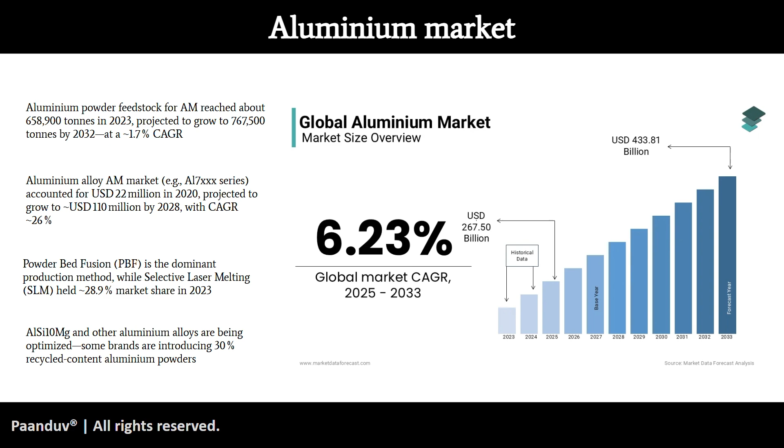If we look at different growth rates, they go all the way from 1.7% all the way up to 30%, but on an average this global aluminium market is growing at a CAGR of 6.23% as predicted for the next 8 years.

Additively manufactured aluminium parts are high performance and they offer many interesting mechanical and chemical properties. They have a very high strength to weight ratio and are weather resistant. They are less rigid compared to steel, and of course there are many other benefits that go around with the aluminium alloys. In fact, when we travel, when we use cars, there are a lot of components that are made of aluminium alloys already.

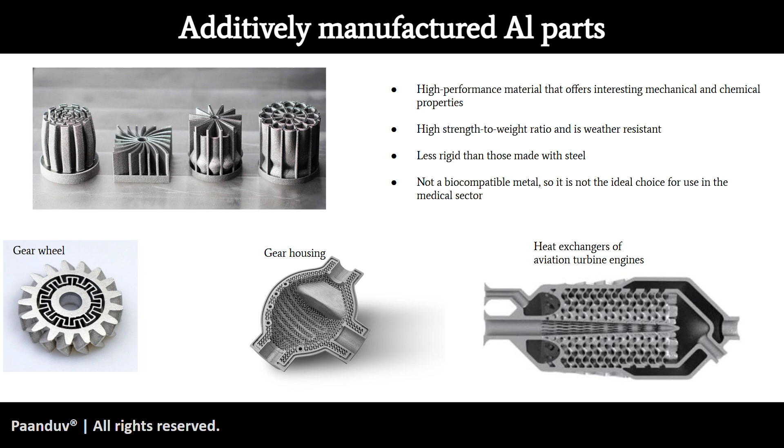However, when it comes to the AM printability or the processability of aluminium alloys, it can be quite challenging. But with challenges comes a lot of scope for research and development and further improving the way aluminium alloys are currently used. For example, the printability of pure aluminium is quite a daunting task. However, AlSi10Mg and other alloys could be an excellent option when it comes to laser powder bed fusion type of additive manufacturing.

Again, if you try to do multi-material welding, for example, aluminium and copper alloys or aluminium, zinc and magnesium alloys, the printability is again poor. It causes cracking, oxidation, poor weldability and problems like that. However, when you talk about aluminium, magnesium, Sc and zirconium sort of multi-material welding, then you can again have excellent printability using both direct energy deposition or laser powder bed fusion sort of additive manufacturing processes.

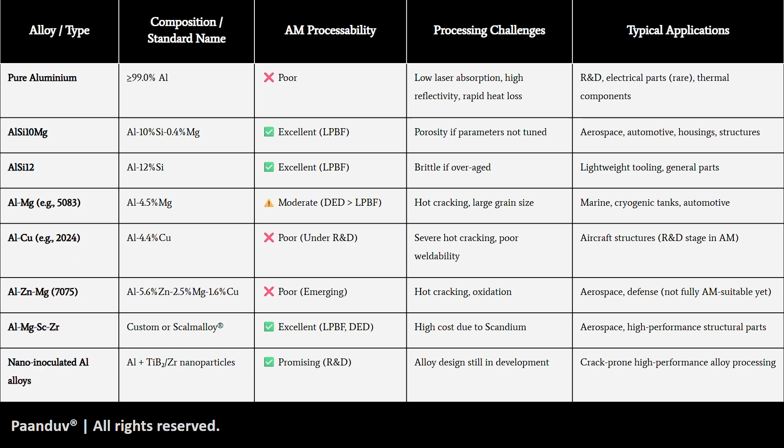When we talk about defects in additive manufacturing, irrespective of whether it's an aluminium alloy or some other alloy, we typically encounter the same sort of defects. They can be more pronounced in the case of aluminium, but the defects remain nevertheless. For example, keyholes, which is one of the most scary defects that all 3D printer users want to avoid; spattering, liquid breakup, extreme porosities, whether due to keyhole or other modes of heating; vapor depression, vapor plume ejection, humps that reduce the surface finish of your part, and many other defects that we encounter on a regular basis.

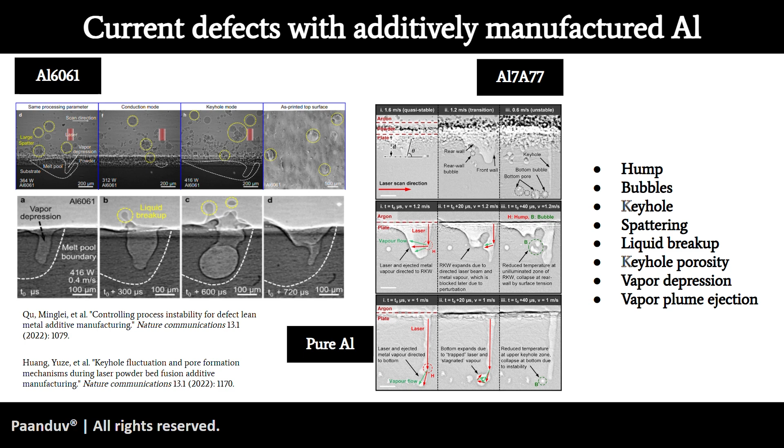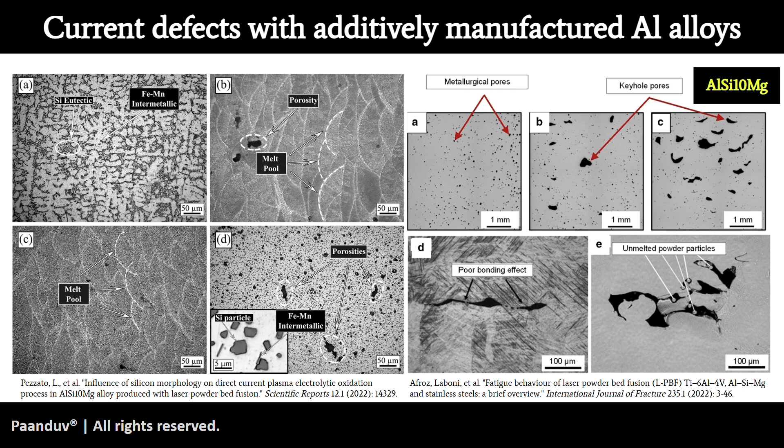Talking a little bit more about these defects, specifically for AlSi10Mg, which is one of the alloys of interest for today's talk. There are many porosity and poor melt pool dynamics related defects. There could be metallurgical pores, keyhole pores, a lot of unmelted powder particles, poor bonding effect, and you name it, basically the entire gamut of defects that you encounter in additive manufacturing in general can again be seen in AlSi10Mg alloy, which has a lot of applications in aerospace and defense, but also comes with its own set of defects.

There are many ways of getting rid of these defects that we encounter in the additive manufacturing industry in general, and the same methodologies are also applicable to aluminium and its alloys as well.

A typical aspiration for an AM process engineer is to provide a sustainable technology, in this case additive manufacturing, to prevent wastage of material, not only during the experimentation stage but also during the production stage, to achieve a heterogeneous fine grain structure or grain microstructure which directly corresponds to the mechanical strength of your built part, and to produce a near net shaped component requiring a very minimal amount of post processing and finishing to the part.

While these are very noble aspirations to have, a significant amount of experimentation goes into attaining these goals. And at the core of it, much of the experimentation that happens goes around understanding the melt pool geometry, goes around understanding the microstructures, using fancy experimental machines at times.

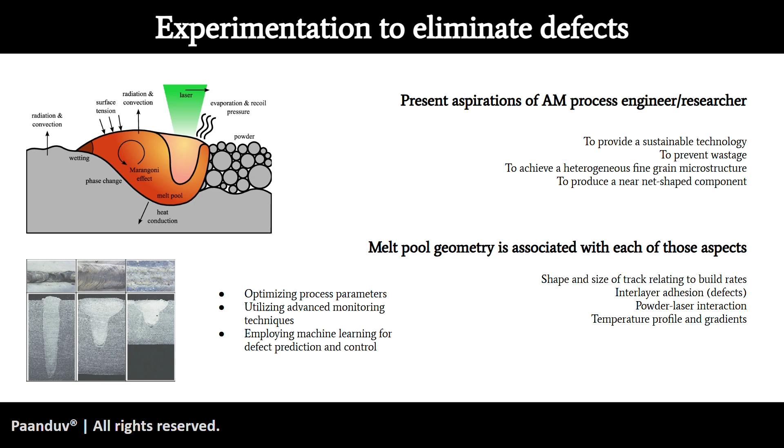The challenges in experimentation are of course there. In short, the cost of such experimental machines can be quite huge. The resources that go behind the type of expertise that is needed to operate these machines is quite huge. The cycle time could be in the order of months before you get the data back from the experiments.

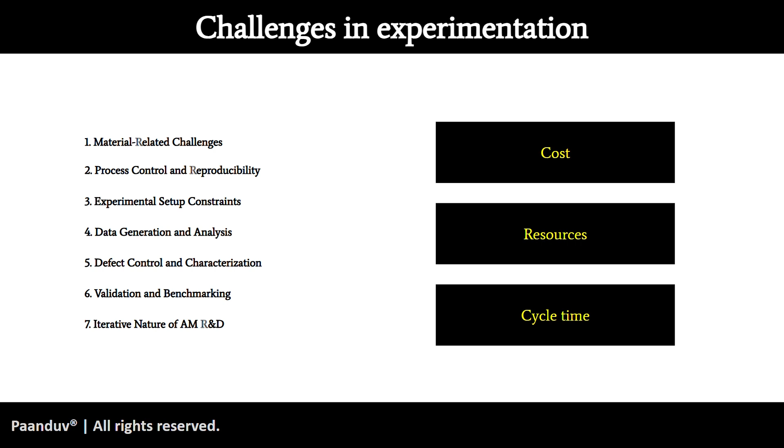And then there are material related challenges, process control and reproducibility, human errors, experimental setup constraints, data generation, storage and analysis, defect control and characterization, validation and benchmarking, and iterative nature of additive manufacturing research. I mean, at the rate at which new materials are innovated, at least at that R&D level, at the speed at which the overall additive manufacturing market is progressing, there's a very fast iteration that is needed to these sort of experiments.

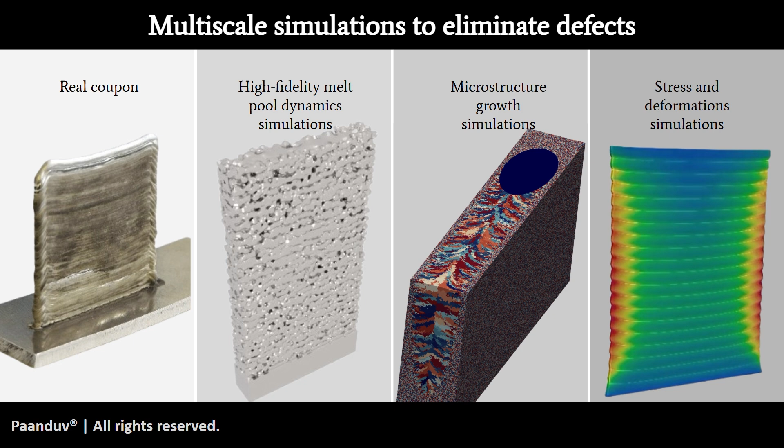The image on the left hand side is a thin plate, a real coupon printed using 3D printing. Then the second image is that of a high fidelity melt pool dynamic simulation for a 20 layer thin plate build, simulated using AM PravaH. The third one is a microstructure growth simulation, the grain evolution of a thin plate. And the fourth one is the stress and deformations simulations, the data associated with the thermomechanical stress analysis using AM PravaH again.

So in short, what I want to highlight is that predictive modeling is quite capable of capturing some of the very hidden details about the defects that can happen in 3D printing processes. It can guide us, point us to the right direction as to what must be changed, what must be optimized in order to produce a very good build, irrespective of the process.

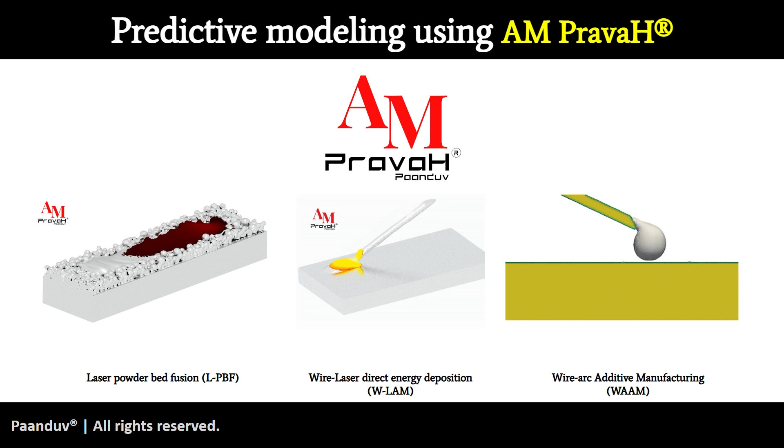Something which is very tricky to do in experiments is laser beam shaping, because there are standard laser machines that exist all over the world. And if you want to make a square laser because you think those lasers are the best in the world, there's simply no way to experiment. The only way left in certain scenarios is through simulations.

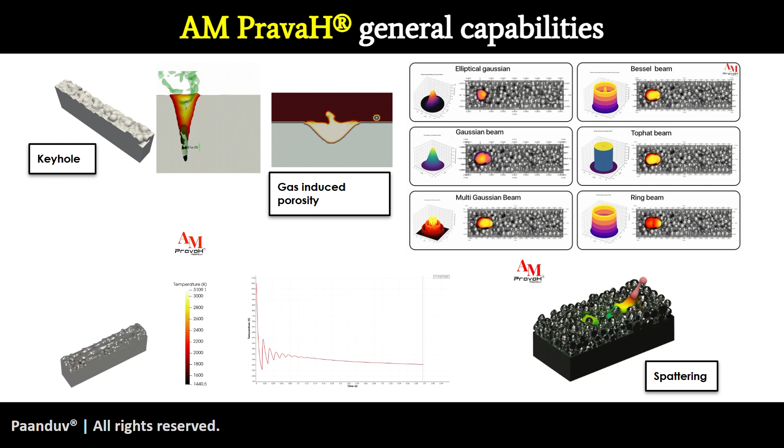The last one is spattering again. This is again a very difficult process to capture in experiments given the very high temperatures at which additive manufacturing processes operate. It could be easily 4,000, 3,000 degrees Celsius. There could be very hot vapor plume inside the chamber.

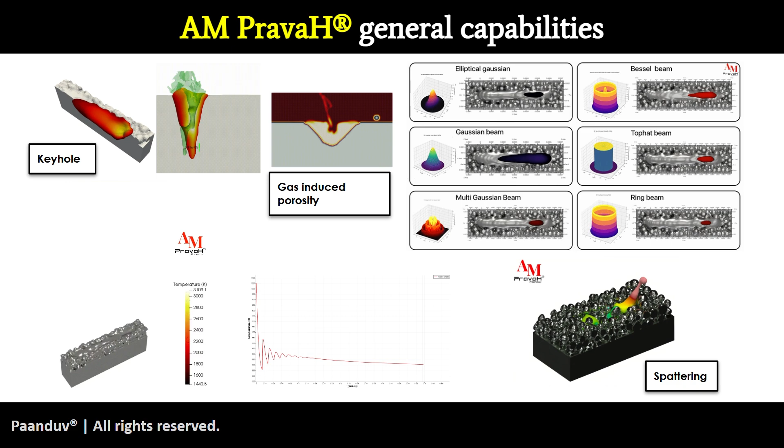So everything that we saw on the previous slide, those defects were captured using melt pool dynamics alone. But then there's a solidification aspect as well associated to additive manufacturing processes. And that's where microstructure evolution, how your grains are orienting, reorienting, or misoriented based on the movement of the laser over a particular alloy, is very critical. You want to look at the crystallographic texture, you want to look at inverse pole figures.

There are, of course, machines, EBSD machines, that can give you this sort of detailed data. But those machines are very expensive. They cannot be operated on a regular basis. They have a very huge cycle time for processing the data. And despite all that, you can do only as much. You can only probably run one or two experiments every month.

But with AM PravaH's capability of predicting microstructures using kinetic Monte Carlo models along with other coupled models, these results can be generated in a much easier manner in a very short span of time, and you can save a lot of money on that. In fact, everything that you see on this screen is generated from AM PravaH.

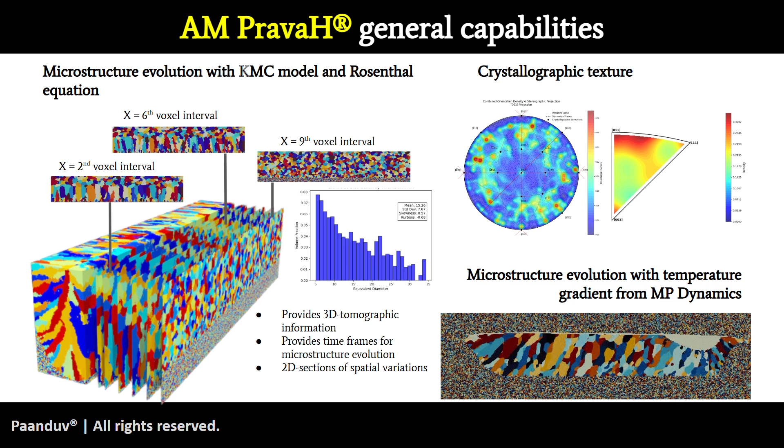Now, it is very important to couple the melt pool dynamics, which is happening at a continuum scale, where all your momentum conservation, your energy conservation, your mass conservation, your phase change, solidification, everything is happening. It is very important to couple that entire gamut of computational fluid dynamics with microstructure data.

So the flow of simulations is, you first run high fidelity melt pool simulations, then using the dynamic thermal and solidification fields, you predict the microstructure evolution. In the background, there's a Monte Carlo nucleation and growth model that is taking care of the grain evolution, grain initiation, and their growth.

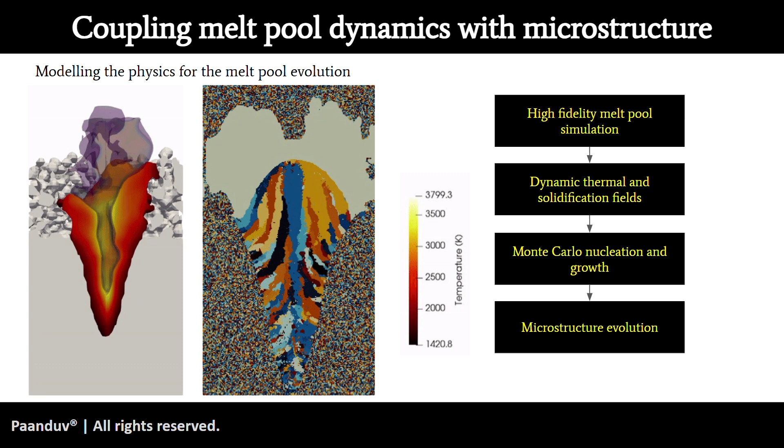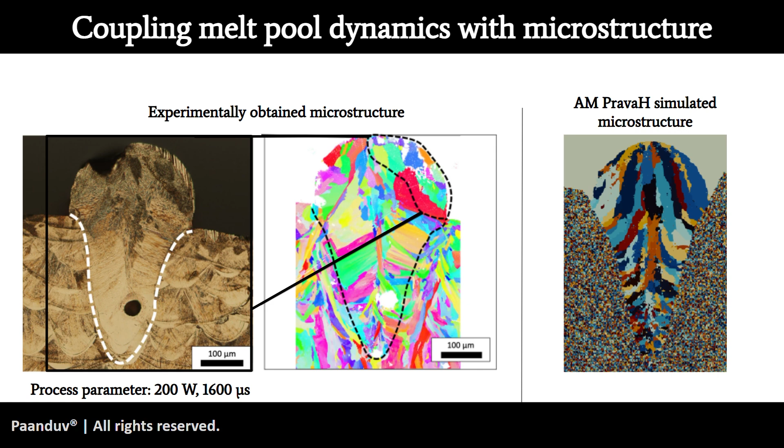So the first two images are coming from the experiments, and just look at the third image, which has come from pure simulation from AM PravaH's microstructure module. Just look at the excellent overlap of these two microstructure images and how nicely, qualitatively and quantitatively, the microstructure information is captured using the microstructure algorithms.

What I'm trying to say is that AM PravaH is the world's first all-inclusive simulation software for the AM industry. It is for the AM industry because it caters to different processes within the AM industry. But more importantly, it is all-inclusive because we are going all the way from powder manufacturing using gas atomizers, plasma atomizers, water atomizers, to powder spreading, to melt pool dynamics, to microstructure grain evolution, and finally to the part scale deformations and stress information.

And to my understanding, if you can capture all these five aspects of an additive manufacturing process, you have basically attempted at the best optimal defect free part production. So we do end-to-end simulation with AM PravaH for additive manufacturing, from AM powder to part scale.

AM PravaH cuts down the cost by 67% in initial process optimizations, 20 to 30% savings on material costing, and it can reduce the rate of failure by approximately 10%. It saves experimental trials and characterization, and sometimes it's not about saving the number of trials, it's about doing the right type of experimental trials.

You don't want to take a very diverse set of experiments just to figure out something close to optimum. You can attain a close to optimum solution using simulations, and then around that optimum you can do more experimental trials. And clearly for AM processes, including LPBF, this could emerge as a very good virtual twin as well.

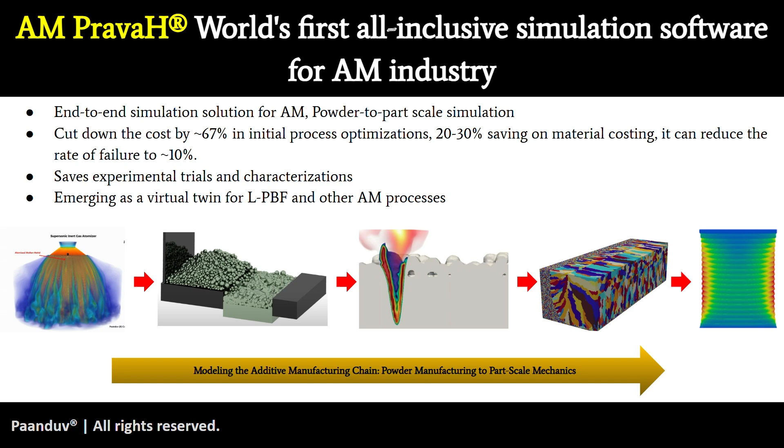Today, for the purpose of this talk, because there's a huge audience, I presume, which will be very interested to know about the simulations of additive manufacturing processes. It could be LPBF or just a good old welding process for different alloys of aluminium, or it could be pure aluminium, or it could be aluminium and copper welding.

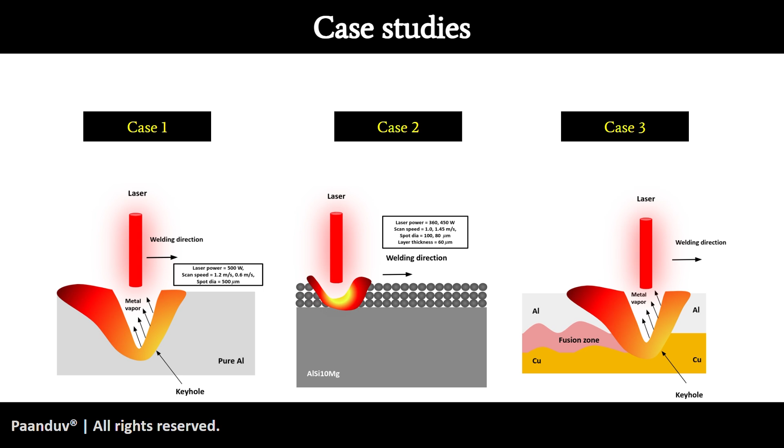So in the first case we'll be looking at pure aluminium. In the second case we'll be looking at AlSi10Mg alloy, and in the third case we'll be looking at a multi-material weld of aluminium and copper, and we'll see how these simulations give us different insights about these processes and how well they compare against the experiments.

Case 1 is the 3D printing of aluminium plate using AM PravaH, high energy density, and there's a huge interplay of multi-physics. I would like to bring your focus to the genuine high fidelity nature of these simulations. Just look at the image on the left hand side, which is coming from the experiments, and the image on the right hand side, which is coming from AM PravaH. Notice the defect formation, the pore formation, the hump formation, and you name it.

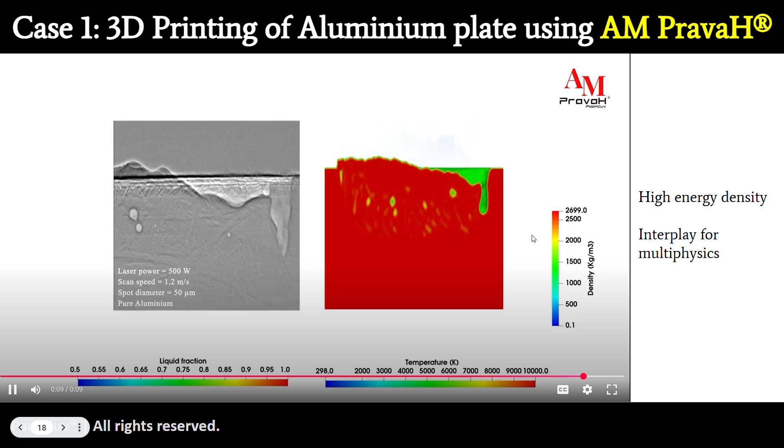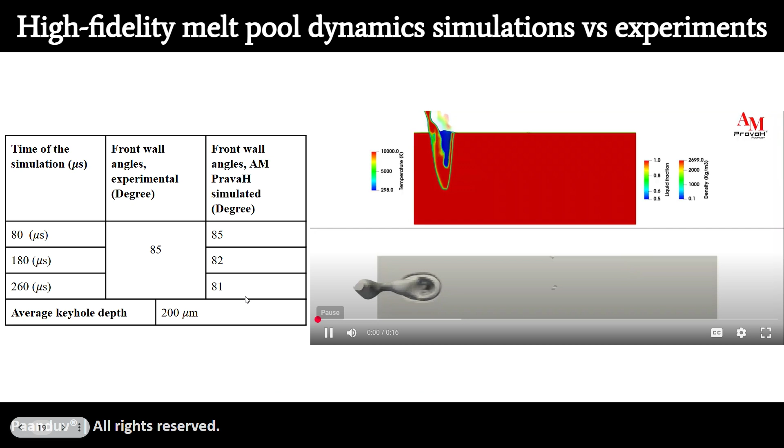While this simulation may look quite straightforward, the amount of physics equations that are solved in order to capture this process accurately has been quite challenging. I want to play another video from a different angle and at an even higher fidelity. Just look at the pore formation, how some of the pores are stuck in the solidification phase, some of them get ejected out. Even observe the plume, the vapor plume.

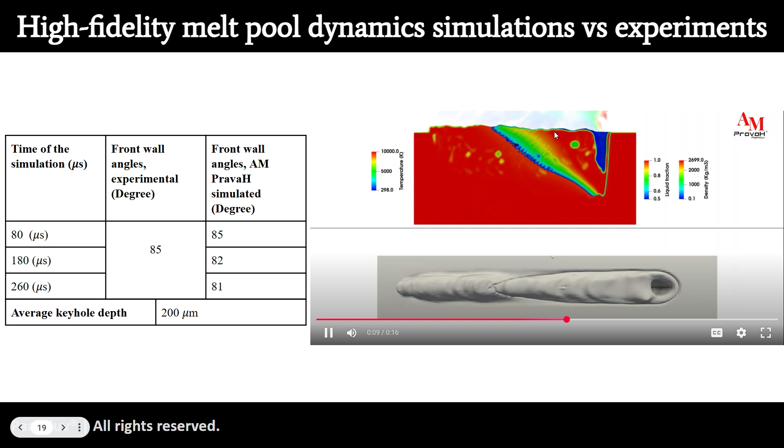I will play this one more time. Just observe the vapor plume which is coming out from the melt pool. And this is one of the rarest solvers in the entire world which captures the vapor plume in its full glory. Most of the solvers that we have either have the solid alloy phase, they have the molten phase, and that's it. But in our case, we have the solid alloy phase, the molten alloy phase, the metal vapor phase, and the fourth phase, which is shielding gas. And all these four phases are captured and simulated in completeness so that we get the most accurate results.

Now let's look at some of the experimental comparisons. So we are looking at the front wall of the melt pool in this case, which is quite important in understanding the defects and how well the overall surface finish of your build part would be. So the front wall experimental angles were reported to be 85 degrees, 5 degrees short of 90 degrees. And what we are seeing at different times from the simulation, at 80 microseconds we are seeing 85 degrees, at 180 microseconds we are seeing 82 degrees, and at 260 microseconds we are seeing 81 degrees.

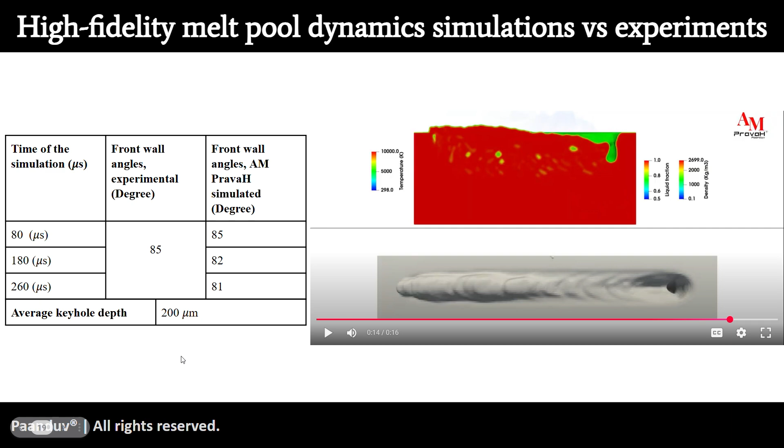Average keyhole depth is 200 microns, and we are also observing very similar depths in our simulations as well, around 200 microns. So very nicely matching the experimental data despite all the complicated physics that goes behind it. Again, I want to highlight the pore formation and the hump formation. So all the mass which has ejected out from the melt pool has been deposited over the top, as you can see on the experimental image on the right hand side in the big oval, and then on the left hand side again you can see a lot of deposition of material behind the melt pool.

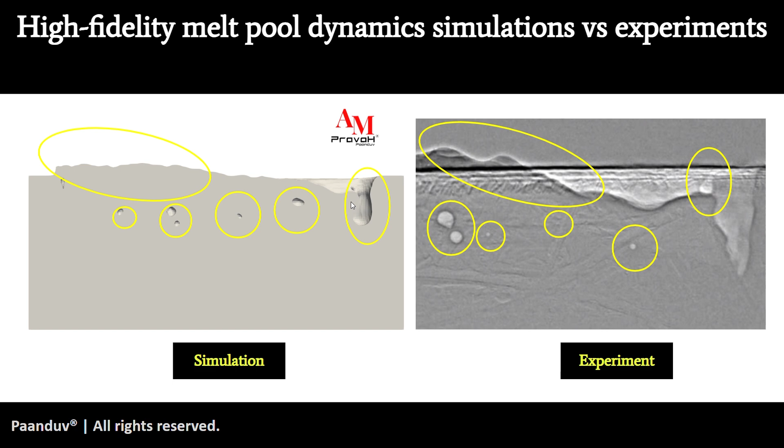Similarly, the pores are almost spherical in nature, as we can see in the experiment and in the simulation. The pores are not only spherical, they are almost at the same location. So if you observe this particular circle, and this particular circle, they are quite identical. Then you have another pore here, you have another pore here, this pore is probably this one, and then even a pore is formed here, which you can see as a slight hole right here.

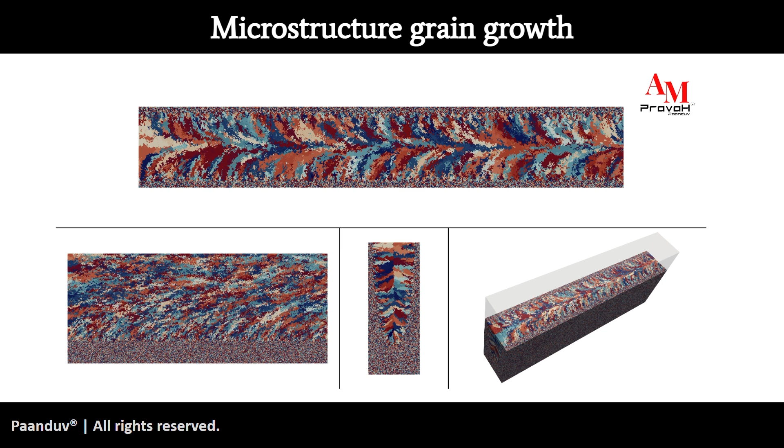The analysis is incomplete if we don't talk about microstructure grain growth. I won't be comparing this against experimental data here due to the lack of that sort of data, but you can see how nicely and in great fidelity the microstructure information is also captured for this pure aluminum plate laser interaction. And you can see equiaxed grains, you can see columnar grains, and such.

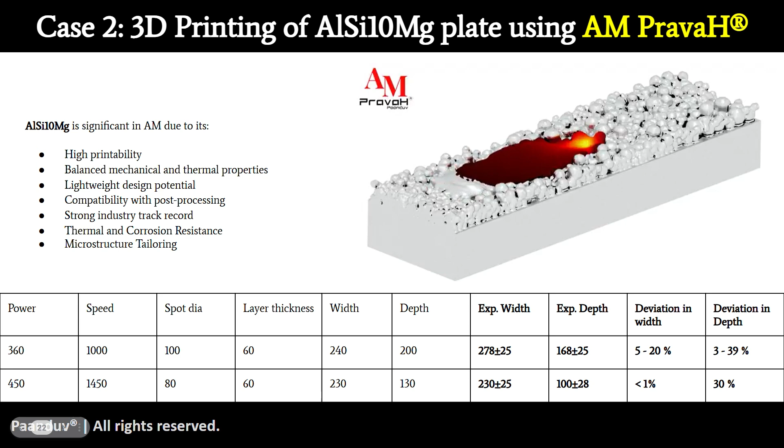In case 2, I'll be talking about AlSi10Mg plate using AM PravaH. So let's play the video first. Again, I want you to appreciate the particle dynamics aspect of it as well. You see how nicely the particle bed is prepared over the alloy substrate using discrete element modeling without any approximations at all. And you see how nicely the melt pool is progressing as the laser progresses over. There's of course an aspect of vapor which is hidden for better post processing here, and you can see how the bands are formed, as is the case in real 3D printing melt pools.

AlSi10Mg is a huge thing in additive manufacturing because of its high printability. It has a balanced mechanical and thermal properties set, lightweight design potential, compatibility with post processing, strong industry track record, thermal and corrosion resistance, and microstructure tailoring. So you name it, pretty much everything that you desire from an alloy is done using AlSi10Mg. No wonder it's of interest to the users.

We have done a couple of variations, compared it with experimental data for different power and scan speed and spot diameter variations, and the width and the depth that is reported in simulations matches quite well with the experimental width and depth. Again, melt pool depth and width are the first step in identifying the mode of heat transfer, whether it is keyhole dominant or conduction dominant, convection dominant, radiation dominant, and accordingly, much of the defects that are formed

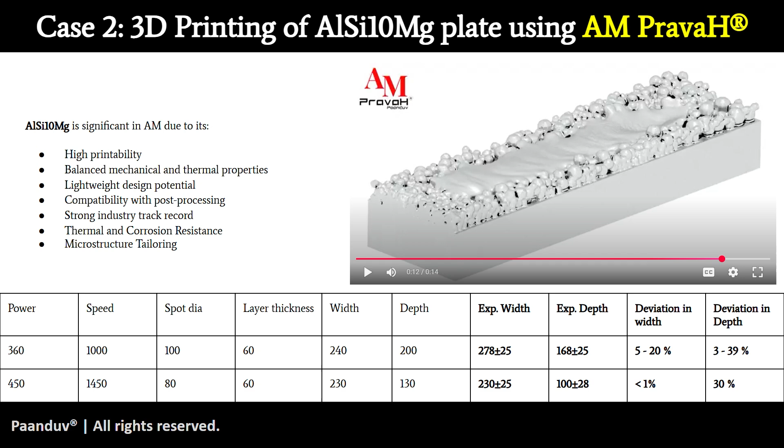can be understood. So the deviation when it comes to width is 5 to 20%, or in the second case it's under 1%, and deviation in depth is 3 to 39%. So again, we are talking about errors typically in the range of maybe single digit percentage errors, all the way to up to maybe, if you take an average of the second one, perhaps 15 to 20% error.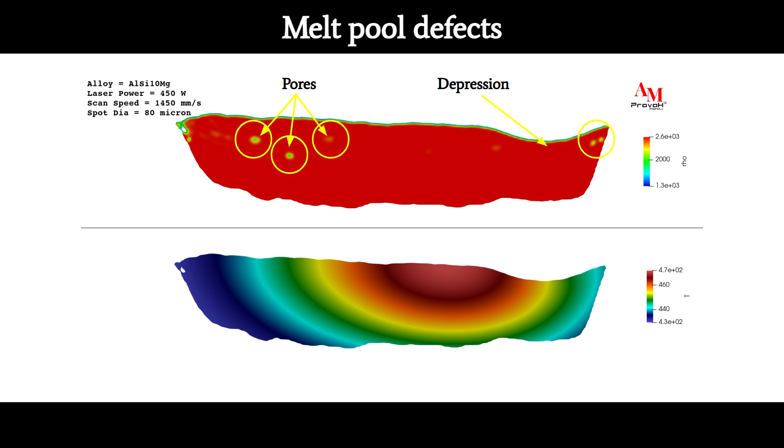Again, without commenting on the pores amount, these pores could be formed of the trapped vapor. They can be formed because of the trapped shielding gas also. So again, a lot of commentary on the pores is quite important in understanding the overall structural integrity of the melt pools.

Moving on to the microstructure defects, or I'm calling it structural defects, because microstructure data can give you very good pointers towards how well this particular build part is going to behave when it comes to the mechanical properties, mechanical strength of the build.

You can see a lot of equiaxed grains are formed, a lot of columnar grains are formed towards the edges, towards the solidification front of the melt pool. However, as we move right towards the center, you can see the circle here, more equiaxed grains are formed. And what you see in the center two images, so the leftmost image is coming from AM

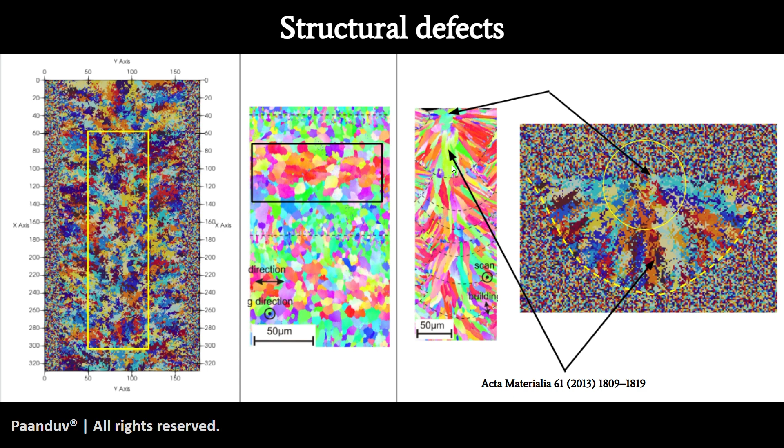PravaH, the second image is experiment, the third image is experiment, and the fourth image is again coming from AM PravaH. So you can see how nicely, if you look at the arrows, the equiaxed grains are matching quite well in the first two images, and again equiaxed and columnar grains are matching quite well across the cross section in the last two images.

You can estimate the structural property using many empirical formulae, or you can further do other sorts of analysis. That is in the hands of the material scientists or the mechanical engineers, how you really want to use this microstructure data. But in the past, this microstructure data has been used with a strength mechanism, the Hall-Petch equation, to predict the yield stress of your build part.

And in order to do that, the AM PravaH software not only gives you images, but it also takes the entire 3D grain information, gives you the mean and the standard deviation and higher moments as well for that data, so that you can use this mean grain size in the Hall-Petch equation or other equations of your interest and predict the yield stress, hardness, corrosion resistance, and other sorts of mechanical properties of a build part.

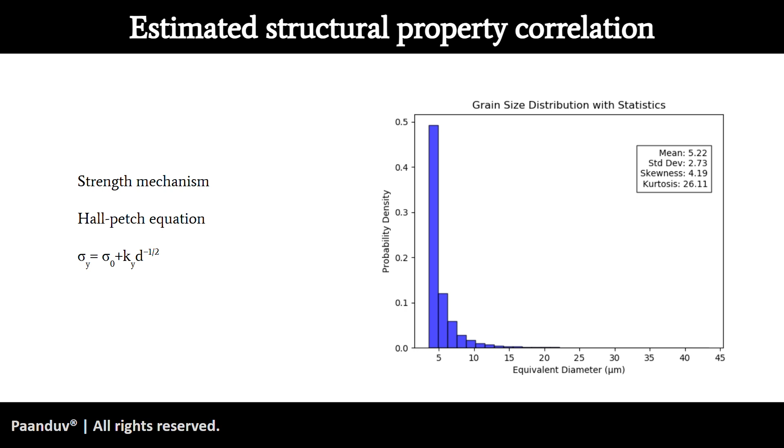The third case that I want to talk about is aluminium copper multi-material welding, a relatively new development in our team. Just want you to appreciate that here the number of phases is quite huge. There's a copper solid phase, there's a copper melt phase, there's an aluminium solid phase, there's an aluminium copper phase, and then a laser is being shot down, first penetrating the aluminium phase and then penetrating the copper phase.

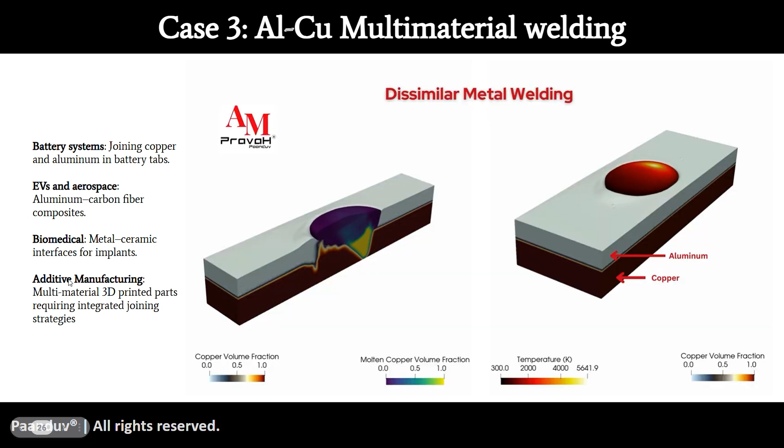And look at the fusion of this interface, how nicely copper is fusing into aluminium, solidifying, and a little hump is formed. If you look at the right image, also called a weld crater.

These scenarios come up quite a lot when you talk about battery systems, where we want to join copper and aluminium in battery tabs, aluminium carbon fiber composites in electric vehicles and aerospace, metal ceramic interfaces for implants in biomedical, and of course in additive manufacturing. There's a lot of R&D that is happening in multi-material 3D printed parts required for integrating joining strategies.

Right. Now, one chunk that we haven't talked about, which is right at the beginning of this entire simulation cycle, is the powder production. When you talk about melting a part using a laser, there's always some form in which that metal comes in. It could be a wire or it could be particles. In most cases, it is either wire or the particles.

A wire may be a simpler process, but the powder production in itself is quite a challenging process, and there's a limited number of atomizers that are available to do that. You can produce your powder particles using an atomizer, where you have very high speed guns of water, gas, or plasma hitting a chunk of your metal and atomizing it; that is one way to go.

The second option is the good old ball milling, but in that case, the sphericity of your powder particles is quite bad, and hence the amount of defects that you can see during 3D printing can be quite huge. So you can see on the image on the top left here that water atomization gives you the worst sphericity, followed by gas atomization, and then plasma atomization really gives you very high grade spherical powder particles.

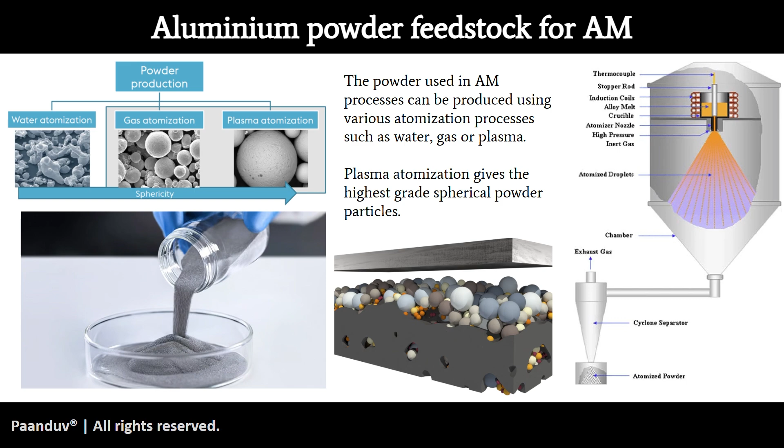But another application of AM PravaH is direct atomization simulations as well, because even if you have an atomizer, gas, plasma or water atomizer, it is quite tricky to adjust its process parameters so that you get the desired sphericity.

To that effect, we have also done some work on supersonic inert gas atomizers, where you have a molten metal block in the center, and at Mach 4 up to Mach 4.5 your inert gas is impinged onto this metal block, and that atomizes the particles. If you look at the bottom plot, you can see the powder size distribution obtained after this atomization process.

You can imagine the physics, and the coupling of the physics in particular, is quite extreme here. You have gas-liquid interaction, which is multiphase flows. We are talking about primary breakup, where the molten jet is disrupted by high velocity gas jets, and secondary breakup, where large ligaments or droplets disintegrate into smaller droplets. You have compressible gas dynamics: high Mach number flows, so you have to use the compressible form of the momentum equations.

You have surface tension and capillary instabilities, with temperature dependent surface tension, because temperatures can go quite high. You have thermal effects, of course, heat transfer, interaction of hot metal with cool inert gas, including radiation, convection, conduction. And at the very end, as atomization has happened, these powder parcels travel down under the influence of gravity and solidify midair.

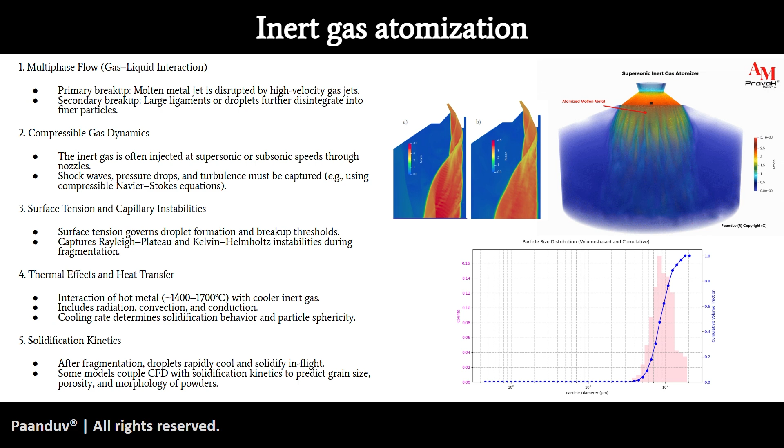This is where fragmentation, droplets, rapid cooling of the droplets all become quite important, and probably microstructures also become important as we try to simulate powder manufacturing.

All in all, with the invention of AM PravaH, we are trying to upgrade every company's technology to its cutting edge, especially in the aluminium industry, by making high fidelity physics-based computational engineering an integral part of their workflow. We have been very fortunate to be associated with some of the top innovators, research labs, and engineering companies all over the globe, who provided their data, worked with us, and trusted us in providing solutions which are typically quite complicated and cannot be dealt with by existing commercial software.